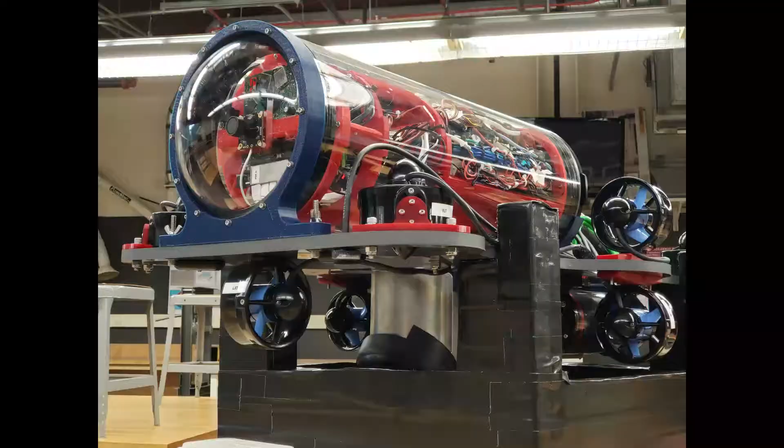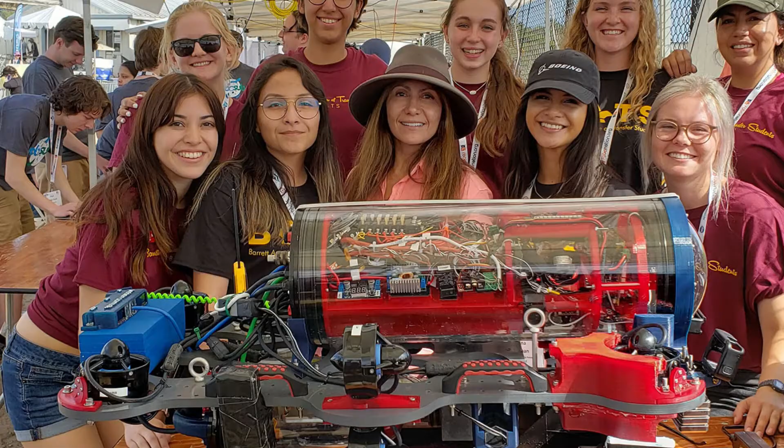With simplicity, speed, and reliable navigation, Desert Wave and our AUV Phoenix placed 3rd overall in the 2019 RoboSub competition. Despite our success, there were many areas in which we wanted to improve. For example, we had to add around 20 pounds of deadweight to make our AUV less buoyant, causing us to earn a point penalty.

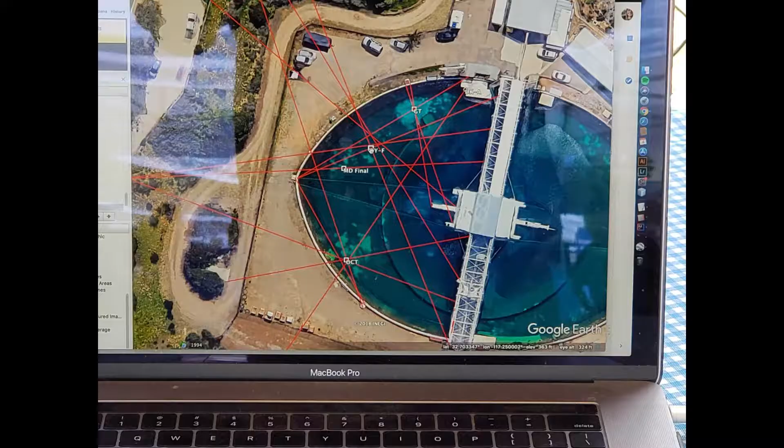Phoenix can only locate different challenges by using survey techniques and dead reckoning. Our ability to complete manipulation tasks was extremely limited. We also didn't finish developing our vision software, so we recorded our runs to assist us with developing vision for the next competition.

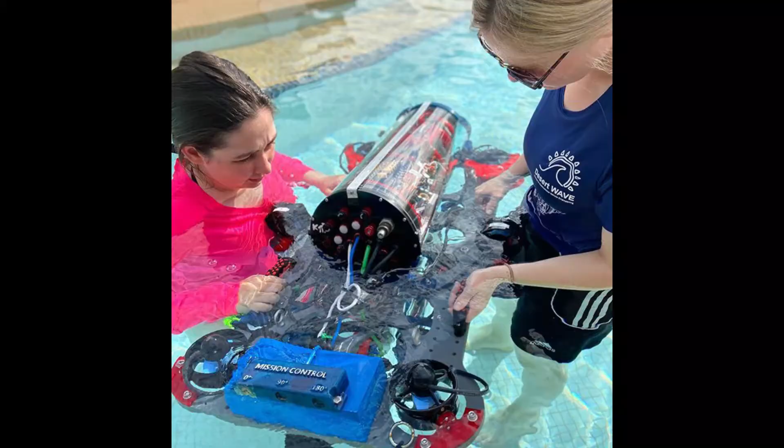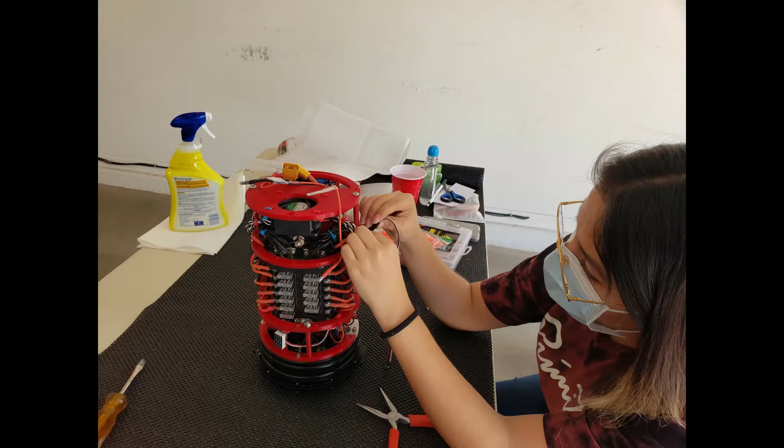A year passed and we created a new game plan by designing a new AUV that builds upon our previous successes and addresses our previous weaknesses. This video documents the process we have made towards completing our new AUV, Dragon. Once completed, Dragon is designed to compete alongside Phoenix, directly addressing her weaknesses. With 2 AUVs, we believe we can win the RoboSub competition.

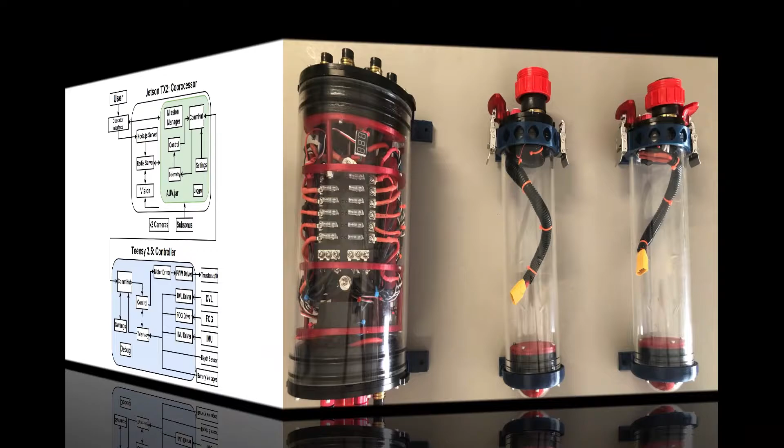Here is a diagram of the software and hardware architecture of Phoenix. Phoenix has one Jetson computer and a Teensy controller to interface with the actuators and sensors. Dragon uses a similar design, except that the role that the Teensy controller plays is divided up into 4 different student design boards to improve sensor handling and performance.

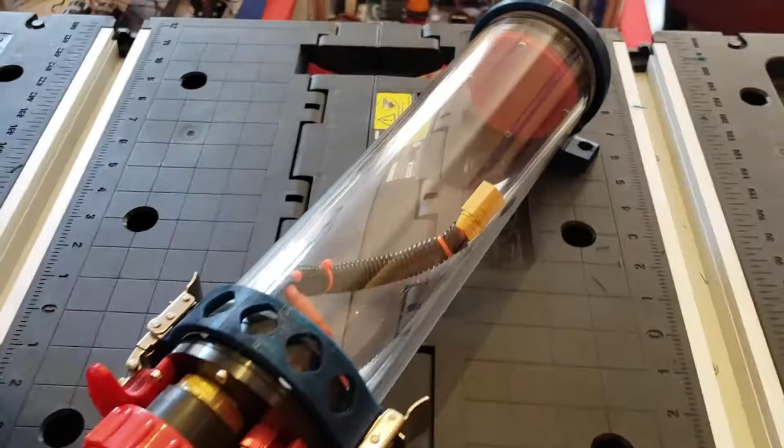Instead of 3 hulls, Dragon has 5 smaller ones. Separating the components into 5 hulls allows for members to work in parallel without relocating the entire AUV. Due to recent health events, this design decision has proven to be incredibly useful. This design also reduces the need for dead weight by reducing the overall water displacement. Each hull is tested for leaks before being assembled to the rest of the AUV.

The thruster hull houses all of the electronics to operate Dragon's 10 thrusters. Inside the hull are student-designed printed circuit boards. Power to Dragon's thruster power bus can be controlled by an on-off switch. In case of an emergency, a connector can be easily removed that will kill power to the thruster power bus, acting as our kill switch.

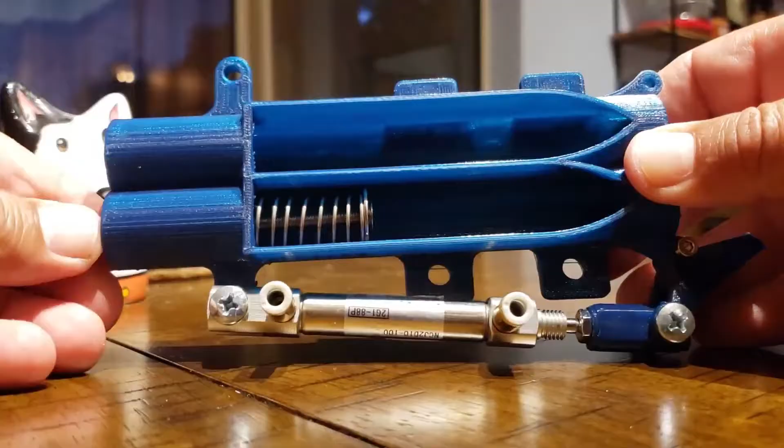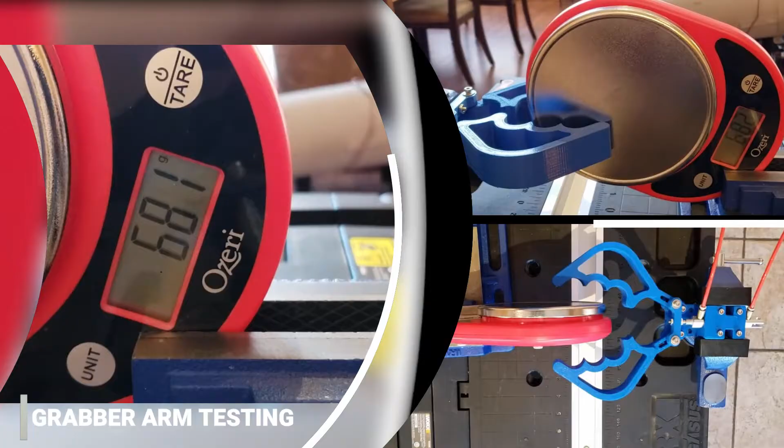Our previous AUV was not capable of earning points in challenges that required marker droppers, torpedoes, and advanced object manipulation. With our pneumatic system, that will change. Our marker dropper, torpedo launcher, and grabber arm were all designed with reliability in mind. Our pneumatic grabber was inspired by a design from Team Bumblebee. Here's some footage of us measuring its grip strength and then picking up blocks. While still under development, it is showing a lot of promise.

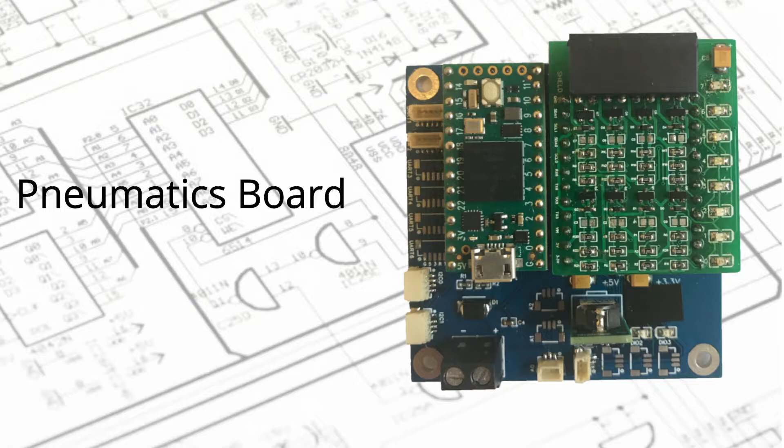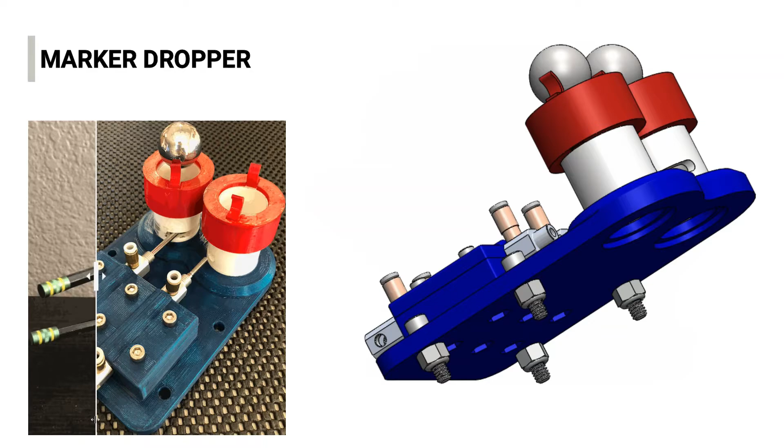Each of these components utilize pneumatic cylinders operated by solenoids that are controlled by our custom pneumatics board. Before completing assembly of the pneumatics hull, a program was designed to test fire each solenoid one by one. Our marker dropper has been tested dozens of times without fail.

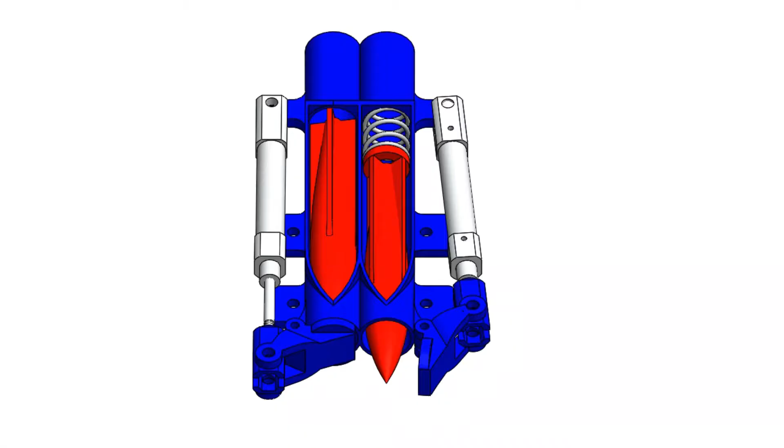Our torpedo launcher uses a pneumatic cylinder to open a hatch in order to release a spring-powered torpedo. It was first tested on land and then in water. We adjusted the density of the torpedo to achieve the right buoyancy to make it fire straight consistently.

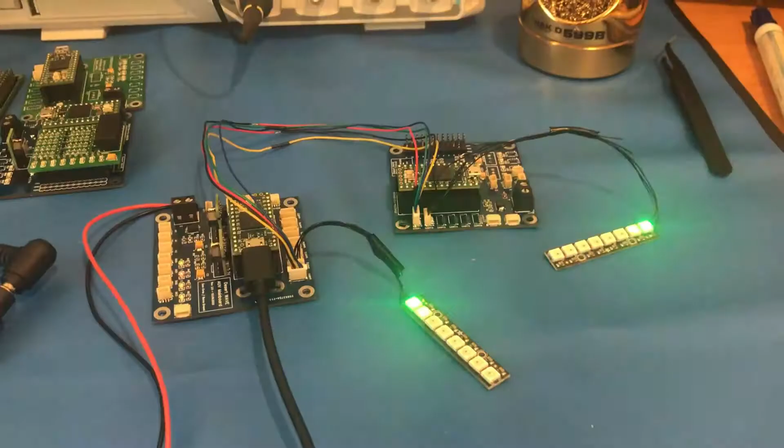Dragon has a Jetson computer and 4 separate student-designed boards. The main board controls the motor, pneumatic, and sensor fusion boards. The main board sends the current control mode to the motor board, and its LEDs will mimic the mode that is defined on the main board. The mimic LED color and pattern indicates information is received.

Navigation to the challenges is accomplished in 2 steps. Mid-course guidance is achieved through surveying and dead reckoning with the aid of sensors like the DVL and fiber optic gyro. The sensor data is fused in Dragon's sensor fusion board and then relayed to the main board. Terminal guidance is achieved by means of visual servoing using one of 2 onboard cameras. During the competition, Phoenix and Dragon will both choose a different side, bootlegger or G-Man, and pass through the gate.

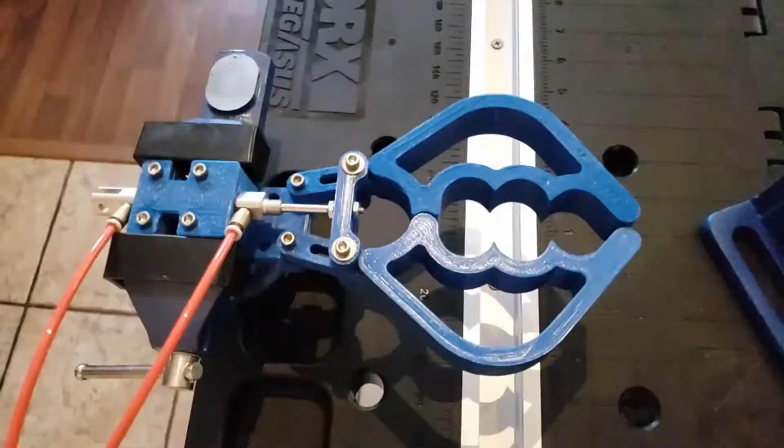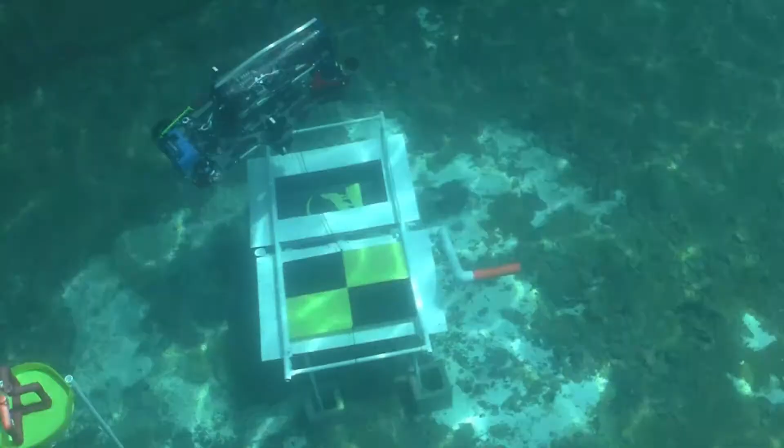Phoenix will attempt the Make the Grade challenge by hitting the correct buoy and then surfacing in the octagon. Dragon will attempt to move the bottles to the appropriate table in the Cash or Smash challenge, open the bin, drop her marker droppers into the collecting challenges, and fire her torpedoes into the smaller hole of the Survive the Shootout challenge.

Finally, if Phoenix was not successful in either surfacing the octagon or touching the correct side of the buoy, Dragon will attempt those challenges. If Phoenix was successful, the team will call the end of the run after Dragon completes the torpedo challenge.

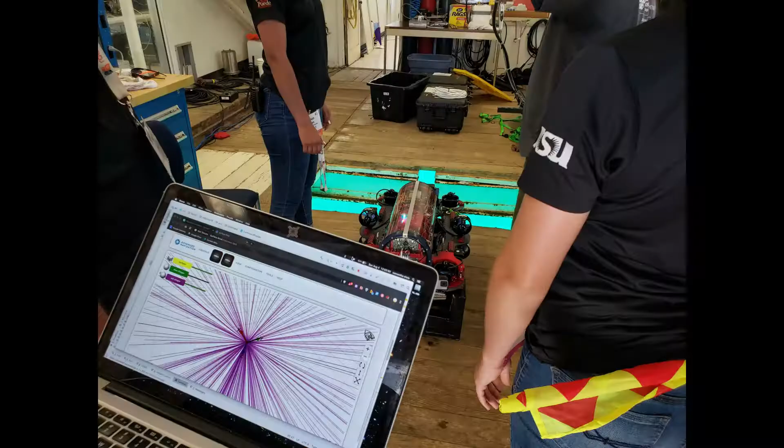We use a subsonus passive sonar to find acoustic signals underwater. We tuned its parameters at the TRANSDEC facility to get accurate pinger headings.

We have all of next year's target images printed and ready to go for in-water testing when it is safe to do so once again. In the meantime, we are hard at work developing algorithms to identify them.

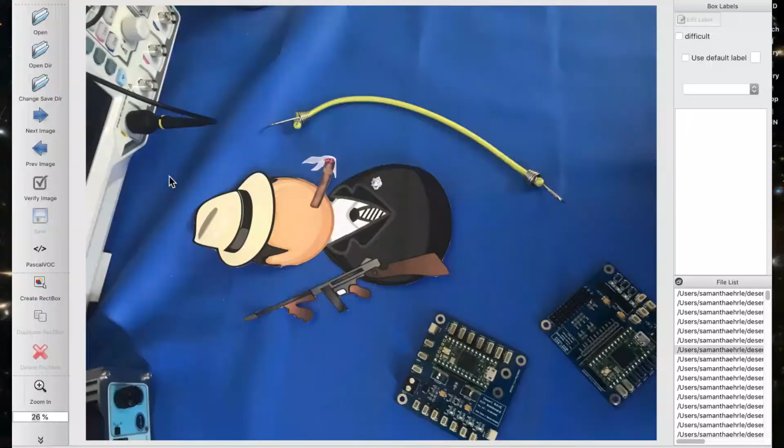For identifying competition elements, like the path markers, Dragon will use a hue saturation value filter technique. For identifying more complicated images, like the G-Man or Bootlegger, the team is training a neural network.

This simulator works as a testbed for most of the AUV's vision development. One module of the interface reports telemetry data from the AUV, while another module is used to set the operation mode. Last year, we used the simulation environment to test Phoenix's capability to navigate to a specific location taken in by user input.

The simulator was modified this year to tell the programmer if the AUV is able to see an object in the simulation environment.

This is useful for when we are in the water, because our AUVs will be able to identify if it is within a range of its target, and with what offset from center in a northeast down direction it is within that range.

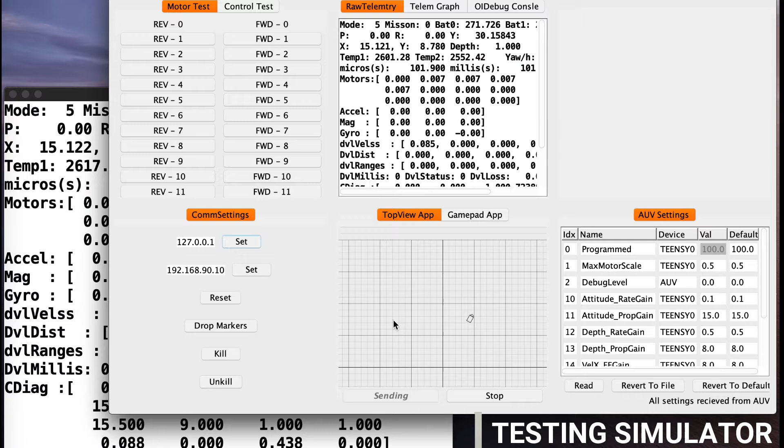When we're not able to test in the water, we have a simulator with a 6 degree of freedom physics model of the AUV that simulates the movement of the robot in response to motor value and generates simulated sensor readings. Additionally, the team utilizes a software-in-the-loop simulator to allow the AUV code to be tested within a modeling environment.

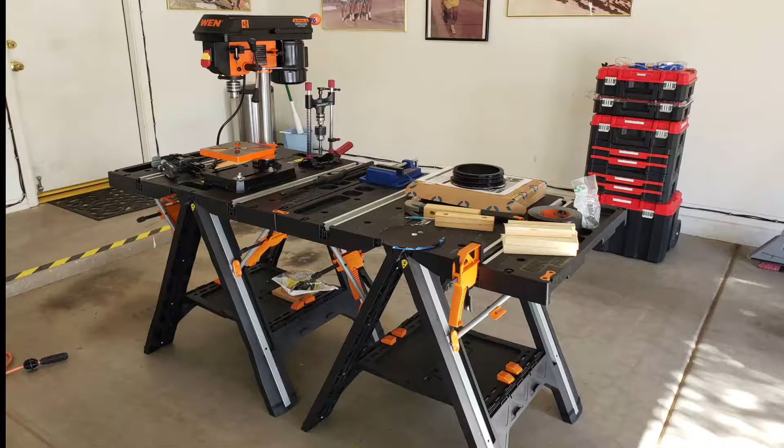This enables remote testing of software without requiring the AUV hardware, by simulating the serial Teensy Jetson connection over a user datagram protocol interface. Due to our university labs closing, one of our mentors graciously opened his garage as Le Javardi Labs, allowing us to continue our work.

Members are required to wear masks and schedule a time to attend an individual work session. The garage is equipped with hand sanitizer and Clorox wipes, and all equipment is cleaned before and after a student worked there.

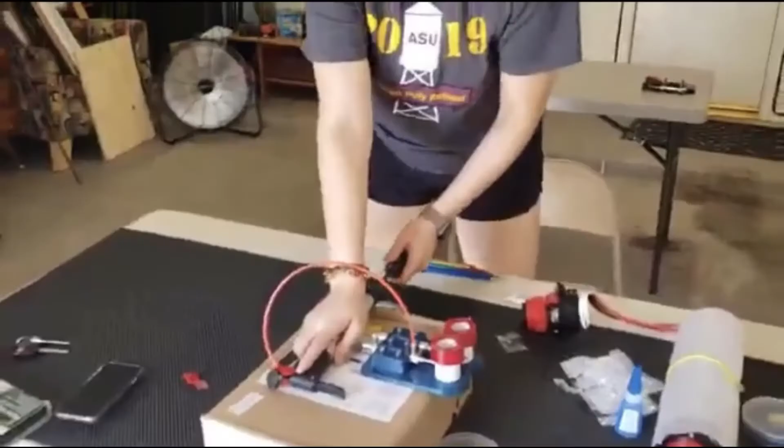Due to the modularity of the Dragon's design, team members are able to easily take home various components of the AUV to conduct work sessions in their own homes. Even though we're primarily working from home, that hasn't stopped us from recruiting new team members.

For all other tasks that didn't require meeting in person, our team turned to using Zoom and Slack to collaborate and keep each other updated on our progress.

Dragon remains to be a work in progress. Currently, we still have to finish designing, building, and assembling the computer hull. Once complete, we can finish designing Dragon's frame and begin her final overall assembly.

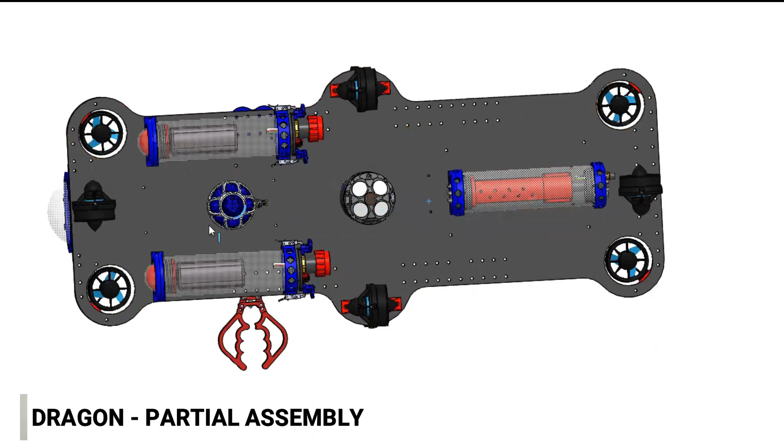There's also a significant amount of work left in software development and testing, which we hope to prioritize this year once the construction of Dragon is complete. While progress has been slower since we are no longer able to meet as a team, slowly but surely, we believe that the ripples of our hard work will bring a wave of success.